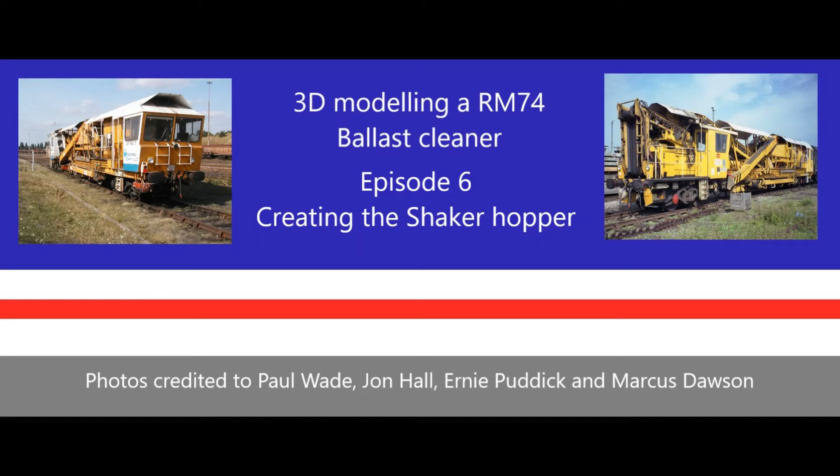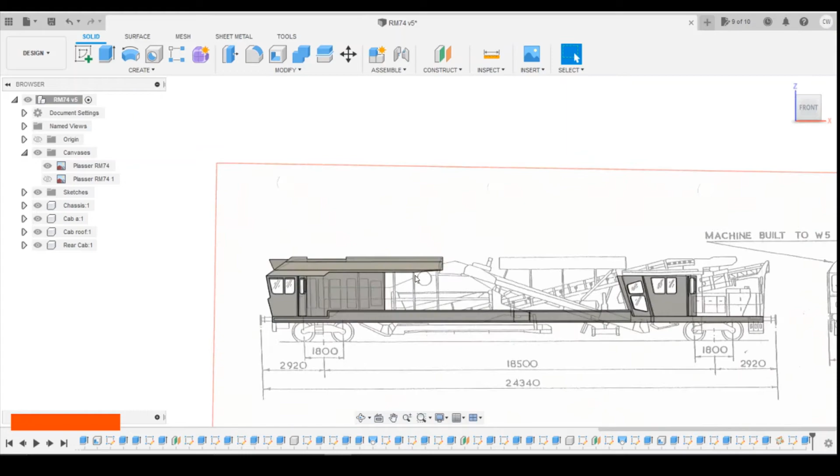As I've said previously, I'm going to try and now move on from these parts. I'm going to try and get bulk details done before I start adding in the finer details. So what I'm thinking of doing today is putting on the shaker deck for sorting the ballast here. We've got loads of decent pictures for it.

The only issue with the pictures is what's below this point coming up here. There's something there, but you can't really make it out. I'm assuming the hopper goes all the way down because you've got the conveyor belt coming up the top here. So I'm assuming there's some sort of hopper that comes down all the way to the bottom here, coming underneath

the chassis. I will produce this, I think, as a separate part. I'm probably going to have to dig out the chassis actually, and have this as a part that sits inside it. But yeah, we'll try and flesh this out as best we can based on the pictures that we've got.

So I'm making a little bit of an assumption here based off of this photo that the side of the hopper sits out slightly from the side of the engine compartment here. So we'll be creating an offset plane to draw the side face on and then extruding across the unit.

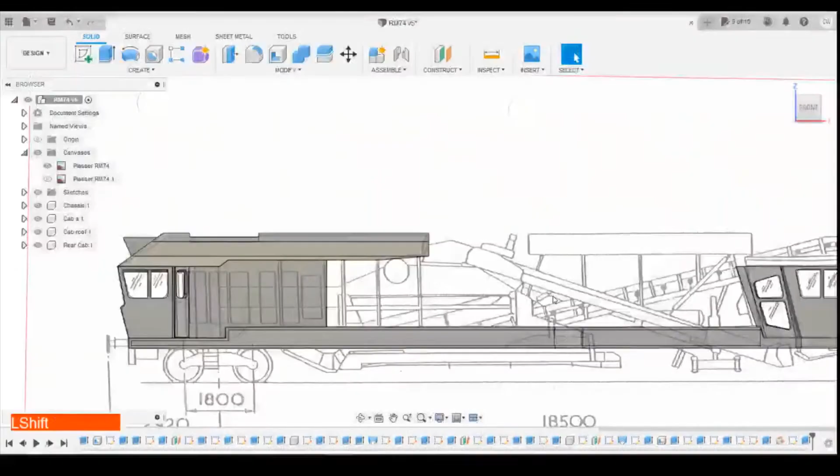Okay, so coming into Fusion, what I'm going to do is create an offset plane, as I said. I'm going to offset it from the side of the engine compartment here. I think I'm just going to come out maybe 0.5 mil, I think, maybe fine. Okay, creating a new component. I'm going to call this shaker. And make sure the radio button's checked when I draw this.

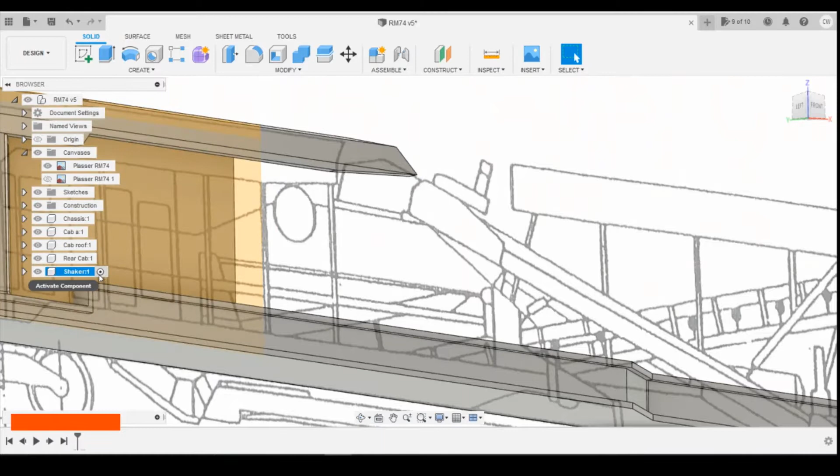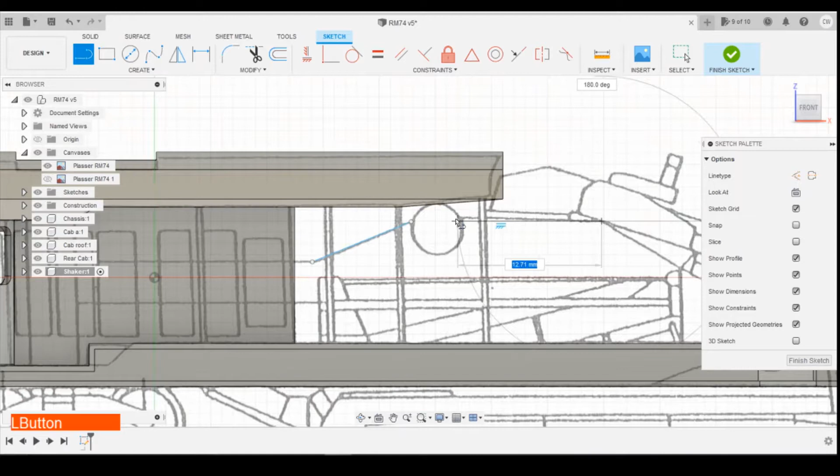Okay, I'm going to create a sketch off of that offset plane we just created, and I'm going to sort of freehand around. So first thing I want to look at is the gap here. So there is a gap. So I'm going to go at that point. Looking at this, it does come up above it. So draw another point from there. It goes up slightly, so I'm going to draw it across like this, and I'm going to drag that part to join, and then cut off just the end of it there.

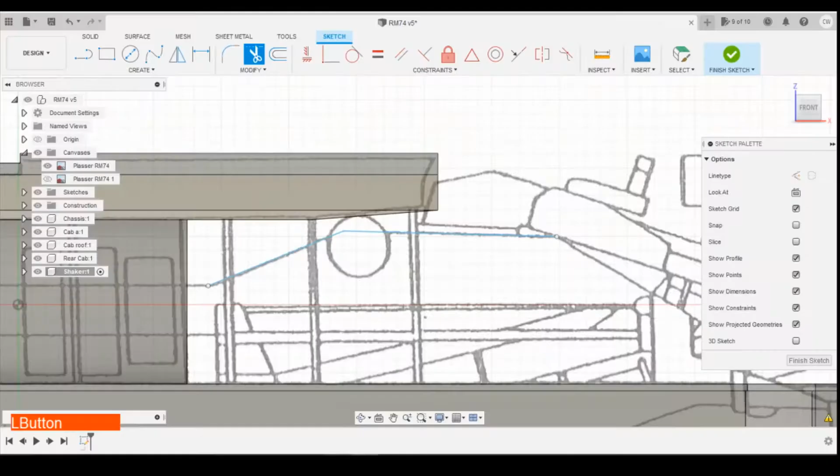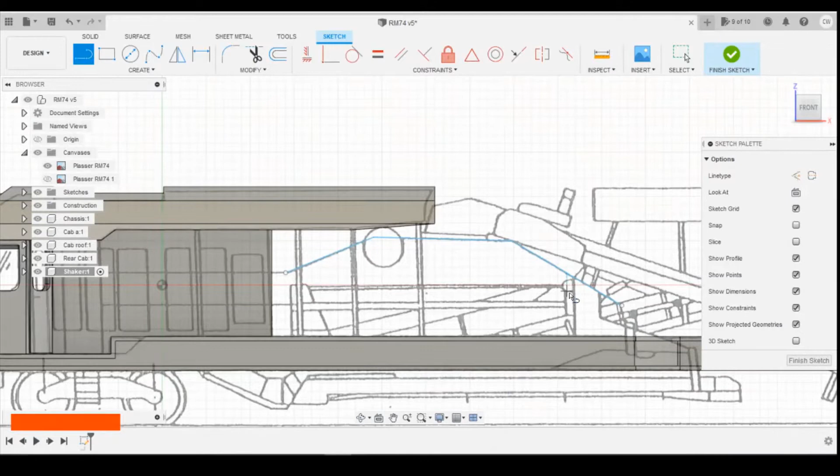Okay, so now I'm going to go down with this part. Let's find out where this intersects. So this comes down a little bit where this ram is. So this, I'm thinking, is the ram here. So I'm going to bring that down a little bit. Try and work out which of these lines now is the one for the bottom of the shaker. So there's two. So I reckon this goes down at an angle underneath here. This is the top part, maybe?

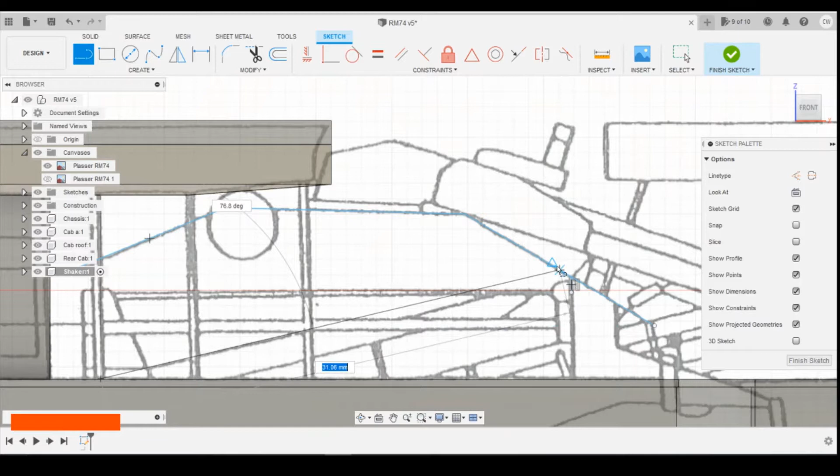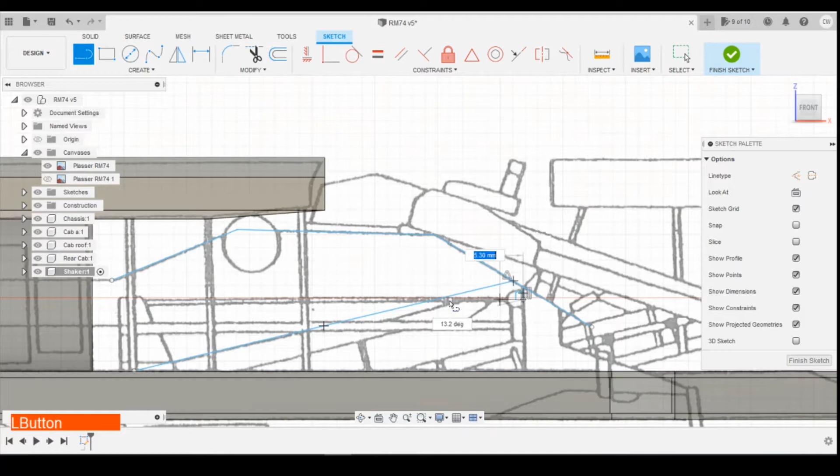Yeah, so I'm going to draw a line on this, trying to drag across. Yeah, that looks like it meets there, okay. And then this bottom part's going to be at an angle, so we'll have to chop that out in a bit. I wonder if this goes flat here, because that angle doesn't come up. I've got a feeling that does this along here. Because looking at this angle, to me it looks like it carries on up here, it doesn't intersect down the bottom here. So I reckon this comes at a slight angle parallel to this beam.

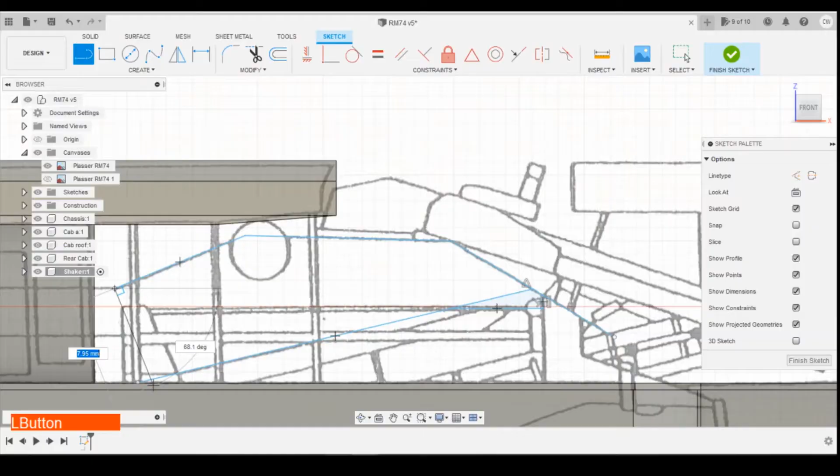Does it come down 90 degrees? I can't really tell because it's all hidden behind the rams and stuff. So I'm just going to bring that down like that. Let's trim out that bit there. I'm going to leave it as that.

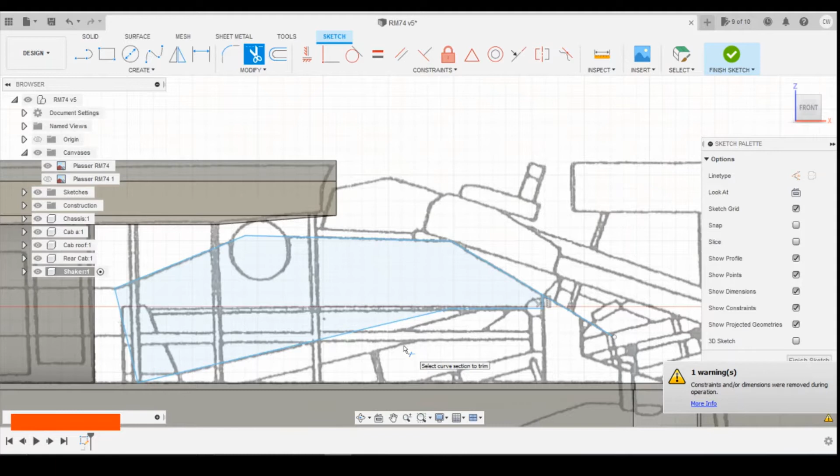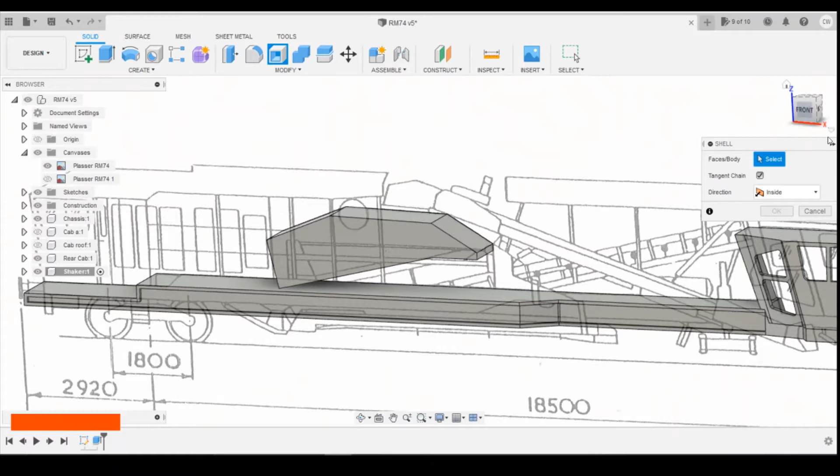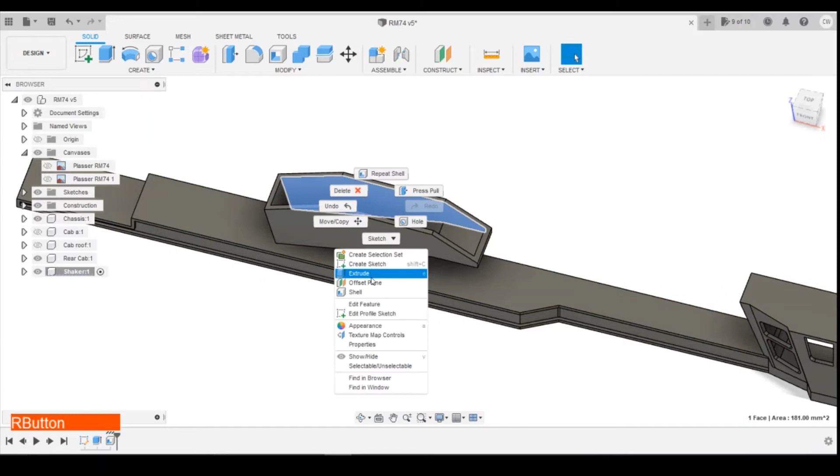Okay, so let's extrude this. I'm going to spin it around. I'm going to extrude it flat with the back of the engine to the middle of the unit. Get a new body. Obviously it's a hopper, so we're going to need to shell it out. Let's turn the rest of these off. Shell on that surface and that surface. So on 0.8 millimeters, and I'm just going to extrude that face off. Yeah, I'm happy with that, I think.

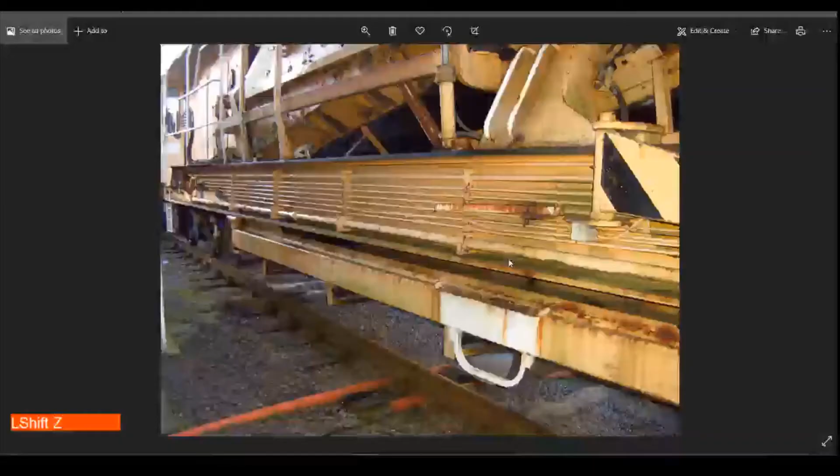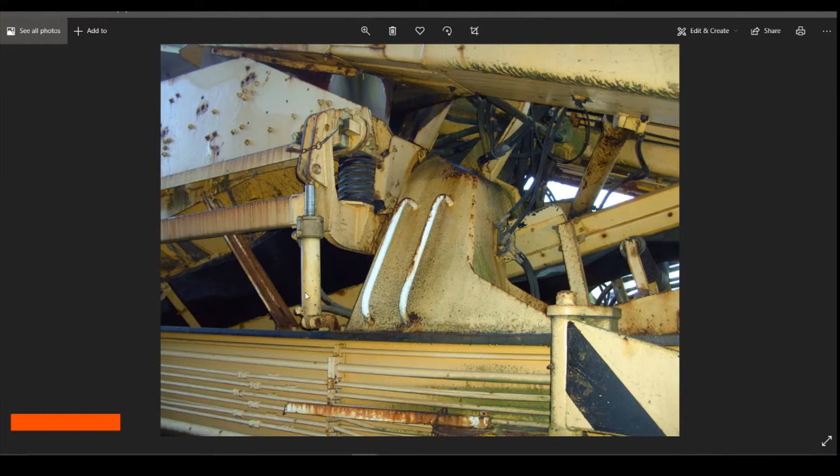Here we go. On this picture, you can see that this definitely angles in on this base, comes up, and that's flat on that surface. And it looks like maybe it's some sort of rubber that feeds into the channel conveyor belt that goes up the top here. So that sort of helped plan this out. So I think what I'm looking to do on here, turn the chassis off.

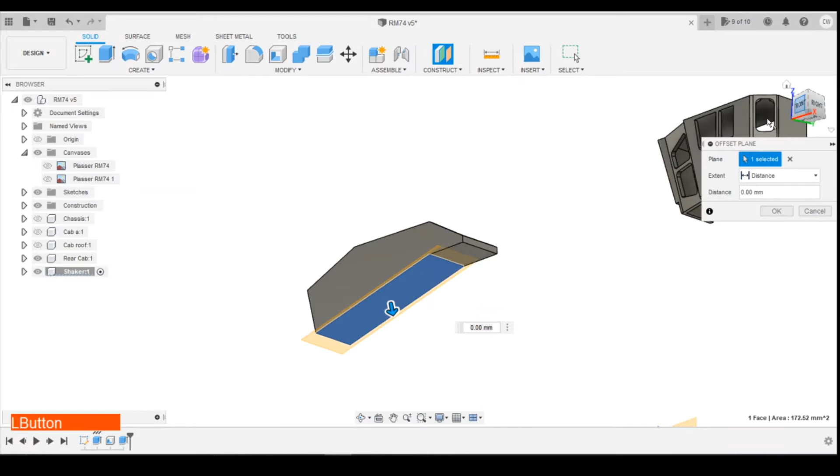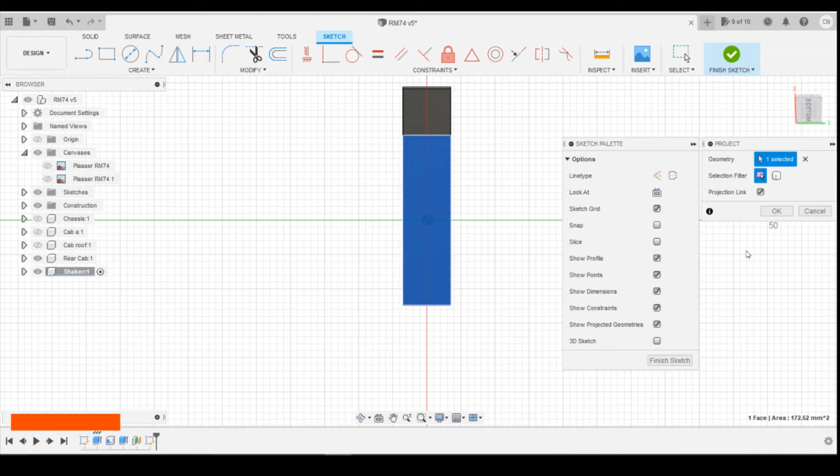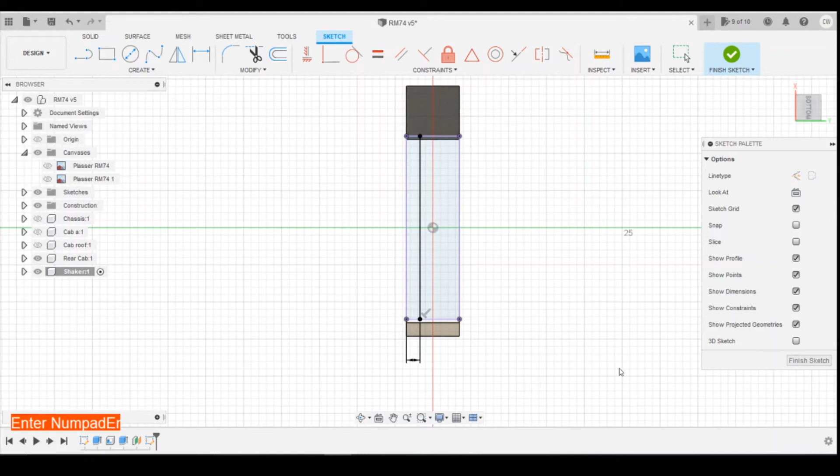I think what I'm going to do is create an offset plane from the angled surface there, just coming down maybe 2 millimeters. And then I'm going to create a sketch on there, projecting on that original hopper, and then just maybe drawing a line that comes along, I think maybe 2 millimeters. And then finish that, and then loft between the two. So loft from there to there to create that angled edge on it.

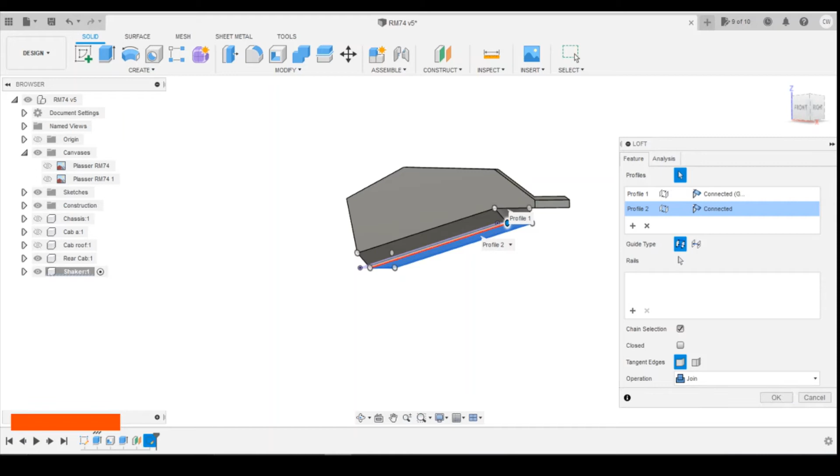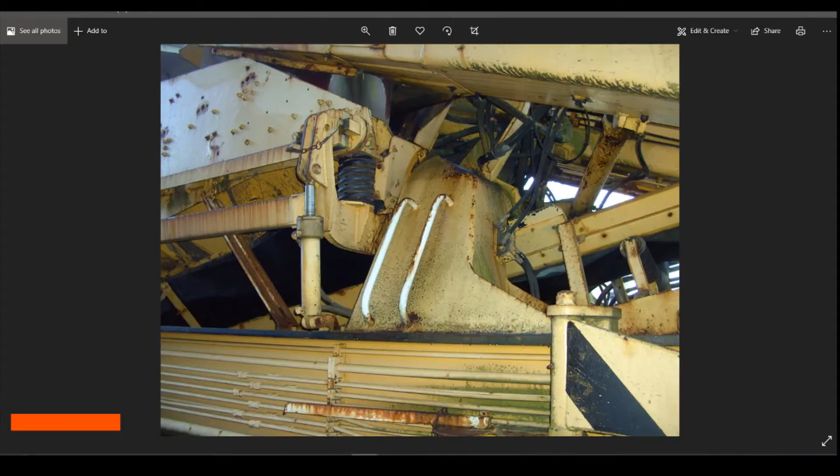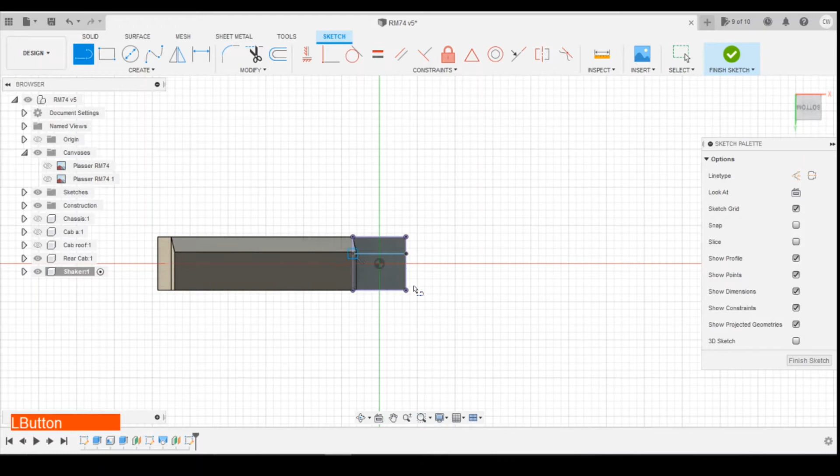And then looking at this one, it looks like it's obviously got an angled piece. This comes down as well. So doing a similar process there, I'm going to create an offset plane there, down 2 millimeters. Sketch onto that surface, projecting the original, draw a line across like that, that's defined. Define the distance there as 2 millimeters as well.

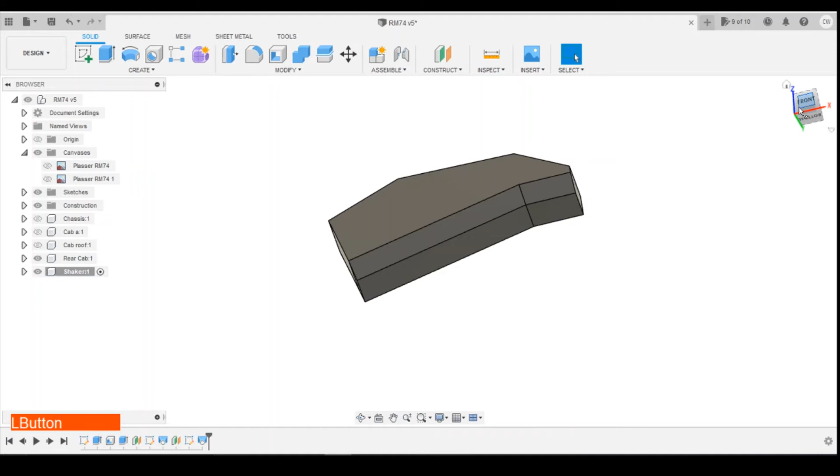Finish the sketch and then loft between the two, so from that bottom surface to the larger of the two there. Tell it to join, not cut, so it doesn't cut through this bit. Yeah, I think that looks okay actually. Let's put these back on. I think for me that basic shape there looks pretty reasonable.

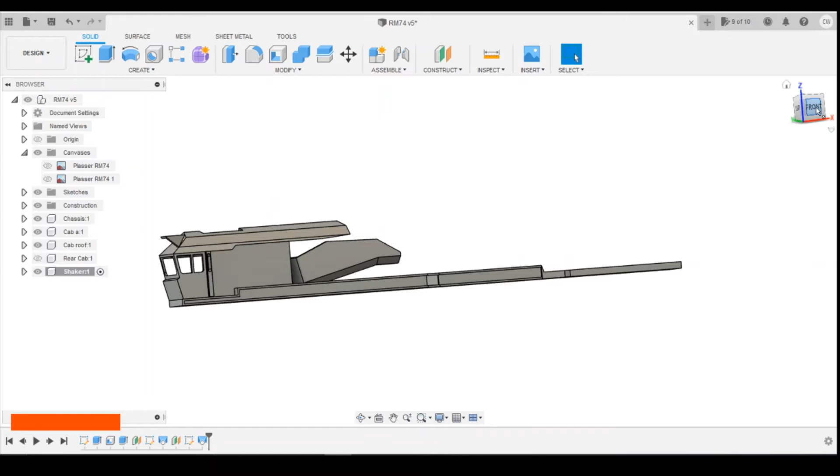Obviously this is a separate part, so the chassis at the moment isn't an issue, but we will have to chop a hole out of the chassis as well. A, for this to fit in, but also the conveyor that goes underneath that comes up over the top of this rear cab here. But I like that, quite like that for the basic profile shape. So let's try and add some more of the detail, but not too much. We're going to try and do some basic stuff to it.

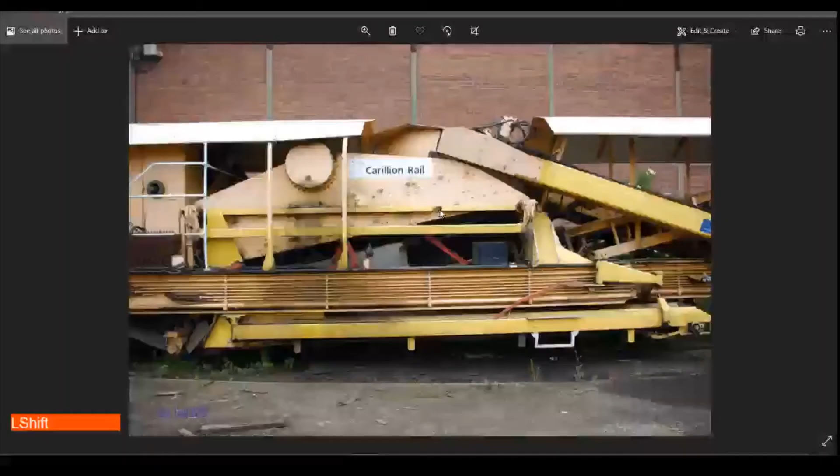So I think I'm going to add on this. I'm assuming this is some sort of motor behind here. So when you look at some of the pictures, it seems to be going all the way across. Well, it could just be a panel there. It's very difficult to see in any of the pictures. But I'm going to add that. So I'm going to add this onto the side here. It's nice and simple.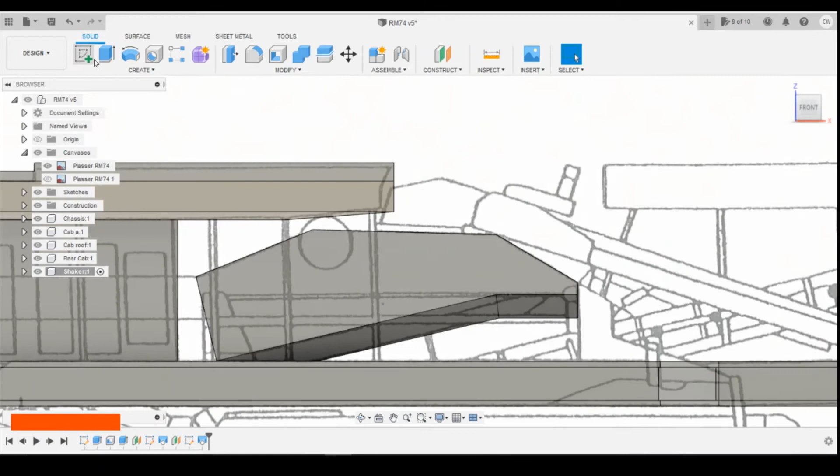Using the canvas as a guide, draw on the side profile of the hopper we've just drawn. Find what roughly looks like the midpoint. Not a bad guess actually. We go 5mm. Is that going to be yes? It's about 4.75 millimeters. Find the height from the top edge there. 1mm, and the height from the corner point there, 1.15.

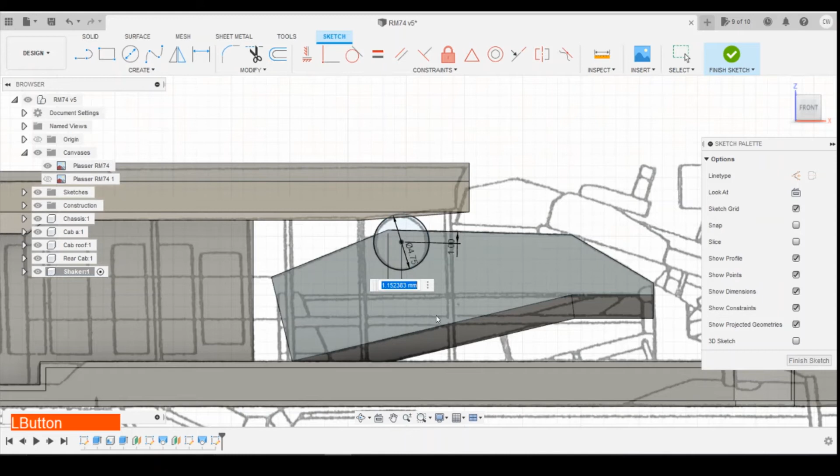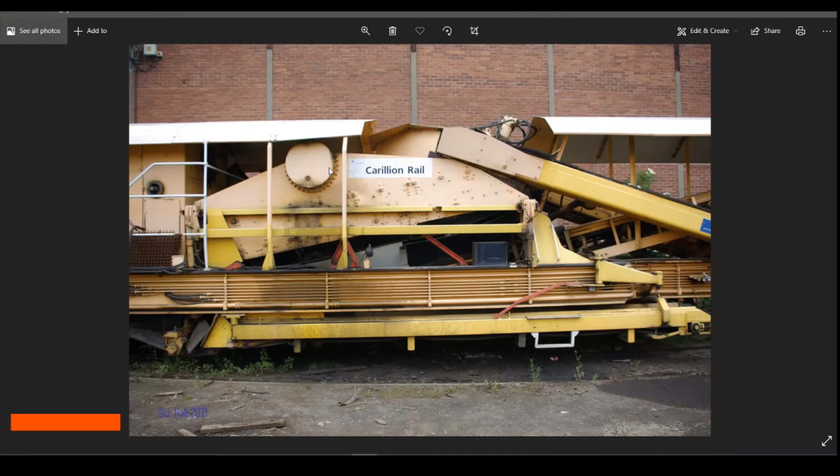Selecting both. Cancel that. Sorry, me fat fingers. Selecting both of those profiles. Just going to extrude this out. I think maybe 1mm. Looking at the thickness there, looks about 6 inches or so. I think that will do on that.

Okay, so I think other than adding a lot of the detail to this, the basic hopper shape's sort of done there. So what I'm going to do the rest of the lesson here is dig out the chassis so that the hopper can sit inside it. Now, as I said, none of the photos are really that great for showing what's going on in that area. If we have a look around, you can see this probably goes a similar sort of width as the shaker, maybe ever so slightly outside it.

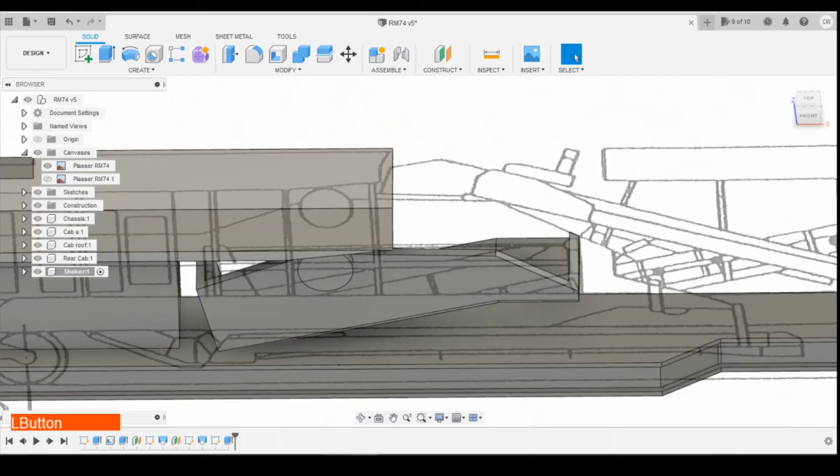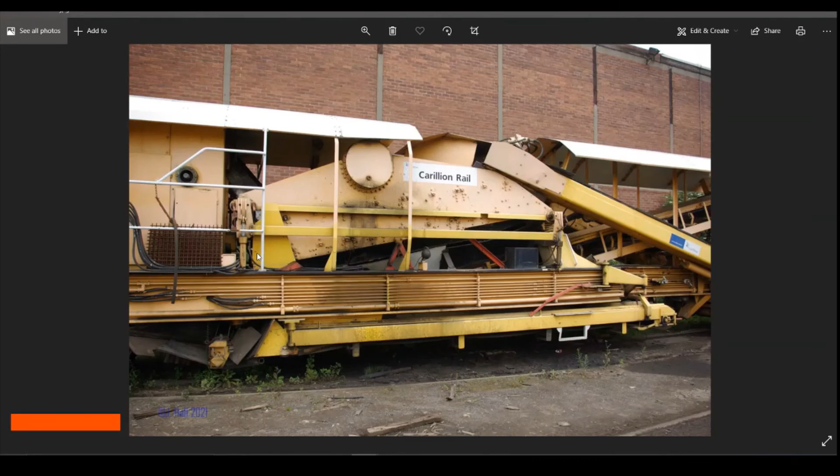So I think what we can do is we turn the cab roof off. I'm going to draw a sketch on the chassis there. Let's have a look, see if we can find a picture that shows the area right behind the cab. This area here. There's nothing. Yeah, I think I'm going to dig out all the way along. So if we select and take that point there. I'm going to come ever so slightly outside the width of the shaker.

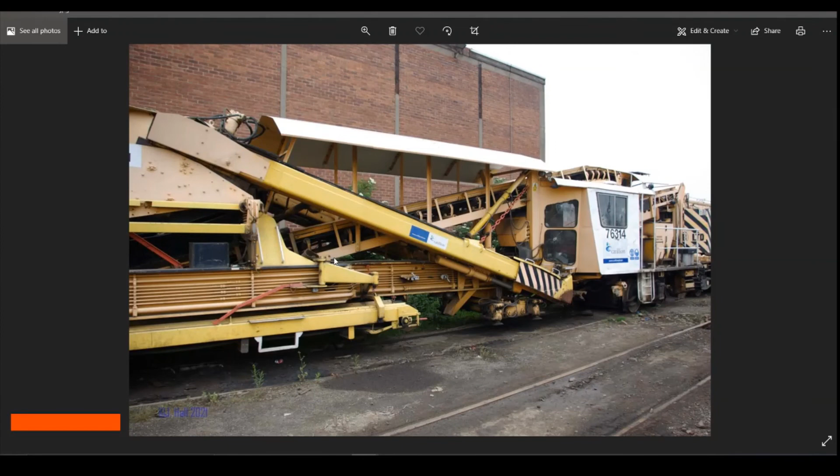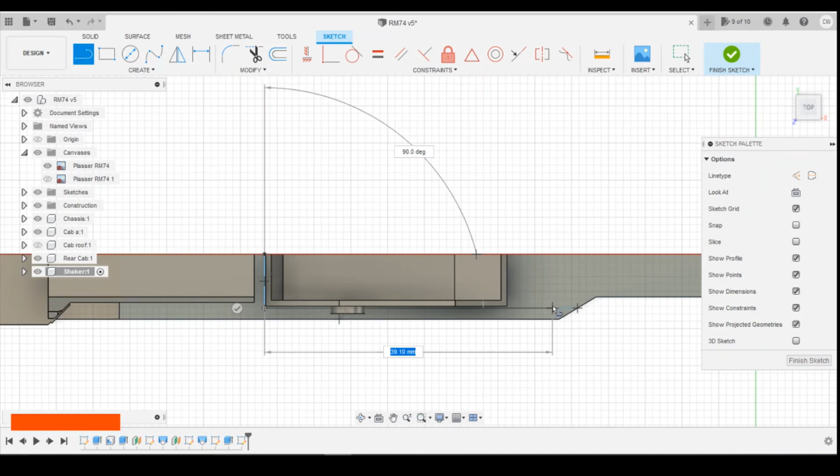Okay, now we need to know what goes to the other end. So we're looking at this area where this conveyor belt comes up. Yeah, I reckon it stops just behind this part here. What I'm thinking is if we come to there, that'd be too weak now, I think. I'm actually going to come slightly back of it. And we'll do that like that.

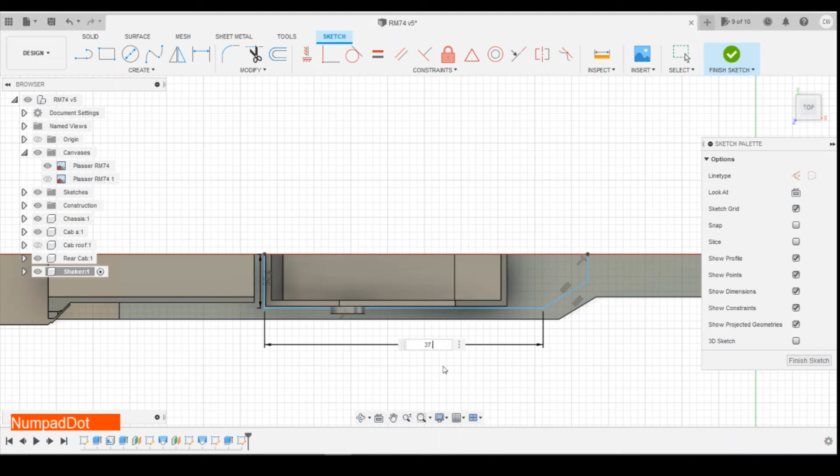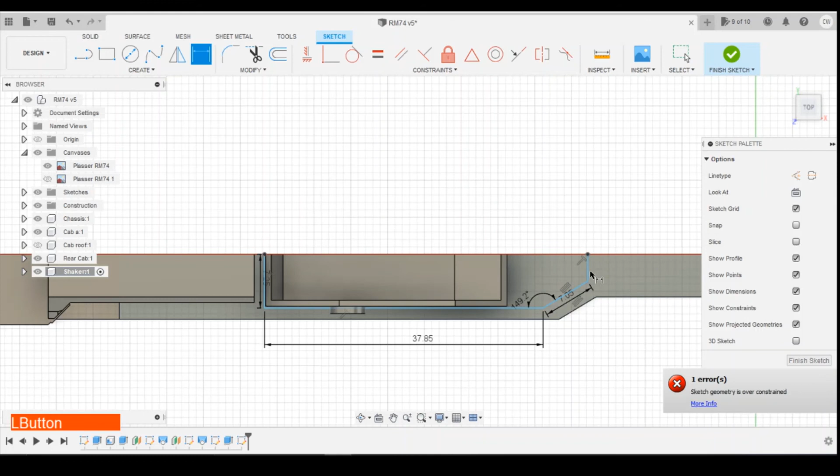Okay. So 7.25 wide. That first length, 37.85. It's going to be 149.2. It's parallel to this side here with a length of 7.0473. That was basically using the blue lines to match up to there. Distance there is already constrained. You'll want the dimensions from there to cover off the end of the chassis. That's all fully defined there.

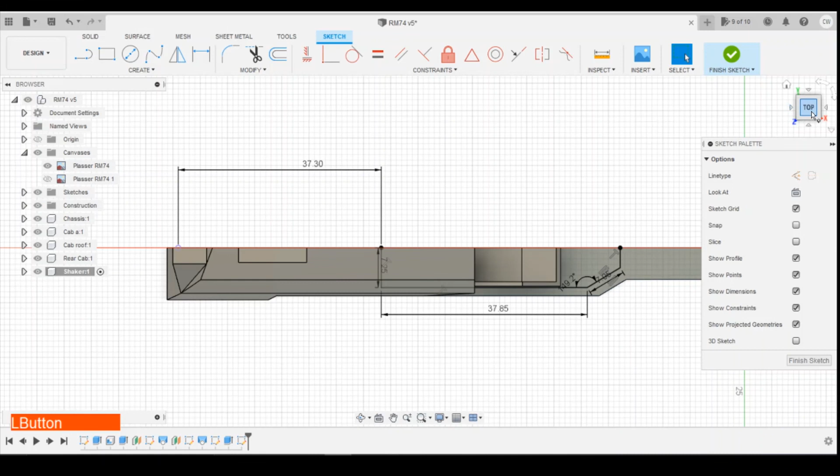Turn the cab roof on, and then we're just going to extrude this all the way through to the base, cutting that. What I might do in the future is add a little bit of support in here if it needs it, but we'll have a look once we've constructed the whole of the unit there.

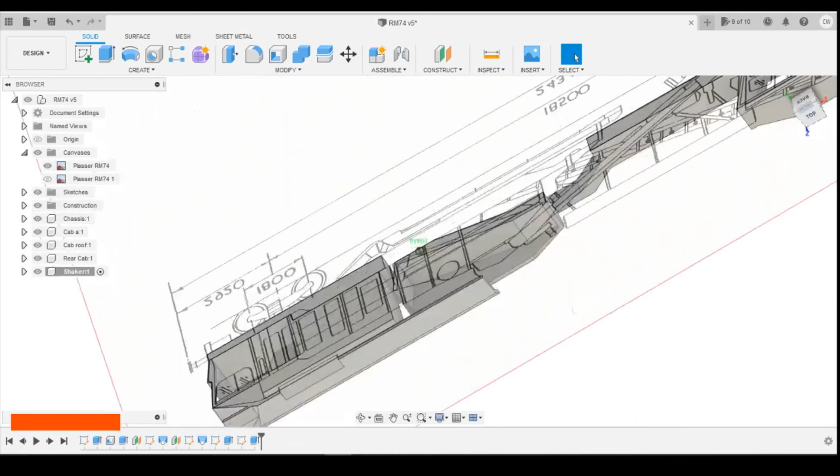Okay, so now I think we've got the basic shape there, we've got this dug out. I think we're going to leave it at that for now. We might come back and add the rubber mounts on this at another point, but it'll depend on how the angle of the conveyor belt looks once we've got that in place. But I'm going to leave this episode here.